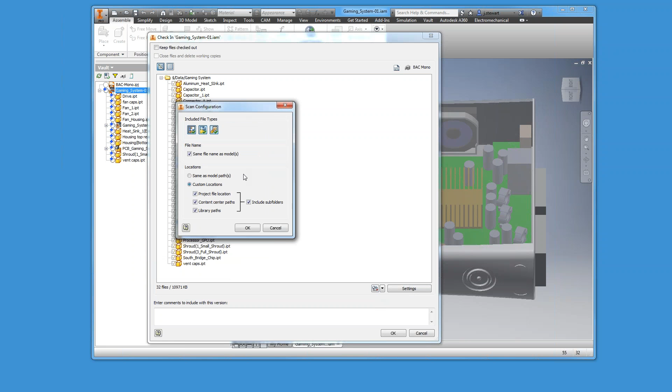You also have the ability to check in models. Just a second. And then you can... So you have the ability to scan through a whole document. If there's 2D drawings associated, they'll pick those up and bring them in as part of the whole check-in, so that the whole model gets checked into Vault, and then we have the ability to assign categories to these and apply life cycles and revisions to them.

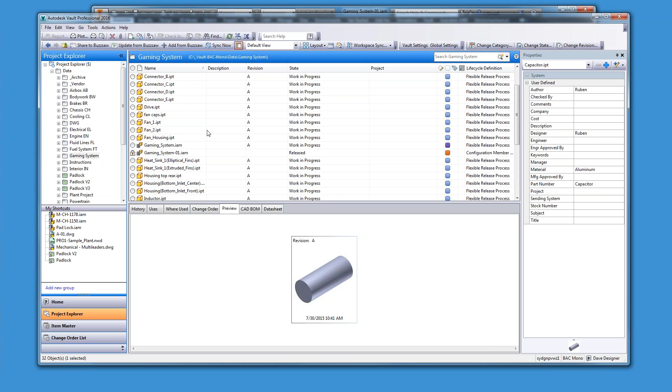So once the document's checked in, you can set it up so that you could do lifecycle changes directly on it, or you can restrict the system to say that changes are only applied through a change order process. And that's a configurable setting within Vault. You can define through the change order whether you want to restrict lifecycle changes to these documents using change orders. And then if I try to do a state change on this document, it will flag me and say you can't do this. It has to release through a change order process.

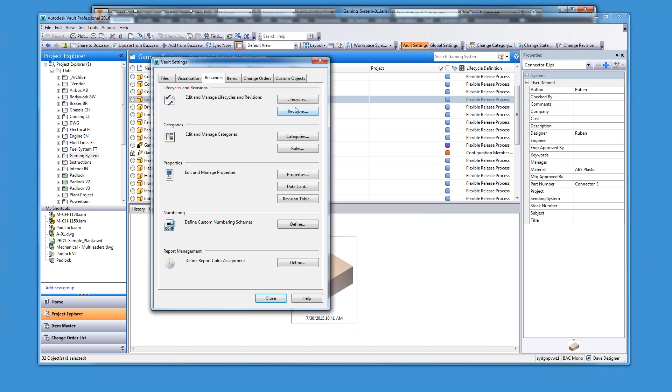So I'll quickly just show you what categories and life cycles look like. In this case, you can put categories on folders, files, and items. I've defined an engineering category that has a specific life cycle and a specific revision sequence tied to it. And then I've got a number of properties that I want describing this part when it gets checked in. So this is the core of Vault document lifecycle, having these workflows with relationships and properties. As you can see, you can have multiple life cycles applied to a category.

So you could have a prototyping workflow that's for the initial preliminary design, you could have just work release, so you're able to capture the history as you do that. I've seen cases where the revision scheme may be numeric for pre-release, where you're saving and keeping those historical versions, and then when you go to production, you can change the life cycle to a longer, more inclusive process of review, checking, and release, and you may even change the revision scheme from numeric to alpha, and follow the process that you have today.

So that's the core thing. You also have these rules that when files get checked in, you can define if the file extension is an assembly, then put them into category engineering. So you build out these different rules for different types of documents to assign them to categories that give them life cycles, revision schemes, and properties.

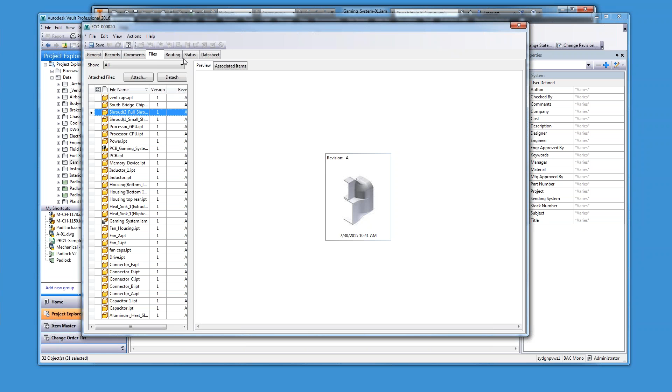And there is the ability then to make markups and give feedback so that as it goes through, you can have external people reviewing it that aren't necessarily part of the design team capturing that feedback, and everything is contained within the ECO for reference. And then historically, you can go to these parts in the future and see them at different revisions and look at the change orders that controlled that change.

So you'll see here I've got some routing lists, so I'm going to change that to a core group of Dave the designer, Ed the engineer, Mike the manager, and Charlie checker. And you'll see this is the workflow that's available. Anybody can create change orders. Then you have this sort of gatekeeper who would assign it to a responsible engineer to work on. And then it would go to a checker who would iterate it with the engineer or designer to make sure it meets and conforms to all of your processes.

Then it gets sent over to a review stage, and here you can have multiple people reviewing, and you can make it unanimous that all of them have to approve it before you can go to the approved state and close the ECO. And at the approved state, this is where you would release the parts that are on the change order, which then locks the documents in a released state at a revision. So I'm going to save this ECO. I'm going to log back out and log back in as Ed the engineer. Let's see.

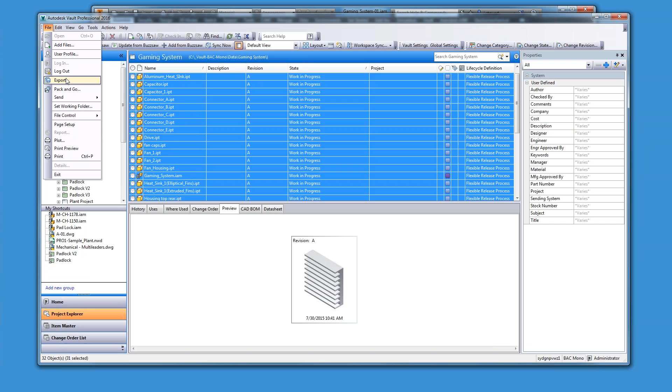Or Dave the designer. Let's see. It's in the work state. Let me go back as administrator.

You'll see also on the left-hand side you have this work order or work list. So basically, as the ECO goes through these different transitions, you, based on your role in the process, will be notified that you have actions to be completed. So in this case, as the administrator, I'm going to submit it, and it'll go to Mike the manager, who's ultimately the change administrator.

So on every transaction, it will then request you to add comments, and these comments then get captured as every action happens through the workflow. There'll be comments created. It'll be there traceable for history.

So I'm going to log back in as Mike the manager, and then I'm going to assign it to Dave the designer. At this point, Mike the manager could review the change order, determine that it's not actually of any value and that it needs to be either cancelled or put on hold for a future date based on maybe the criticality of the change request.

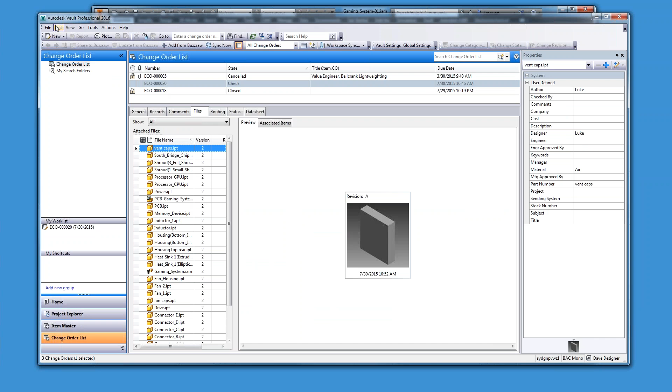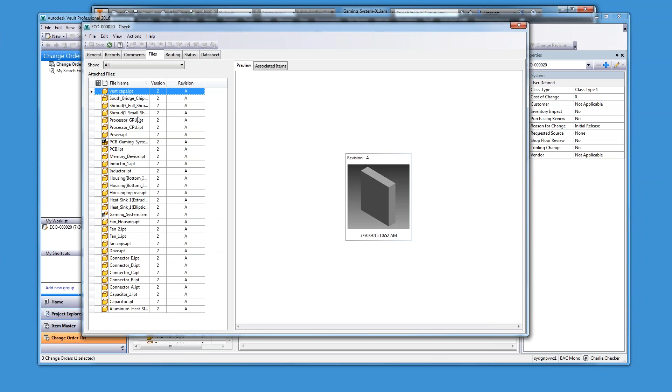So if I log in as Charlie Checker, you'll see he's got a notification for a change order. He probably can't edit it because his job is just to check it; he could view it and respond, or he could add markups. So in this case, he could come into this file, and then he can create a viewable file that then ultimately becomes available to markup.

Let's see. I'm going to actually send it, do an update of the model. So while that's happening, at this point, Charlie's gone through. He can click through all of these. We can actually set it up that these files are basically generated on a state change, so they're automatically set up. So he can come in here, and then he's got a fully active markup.

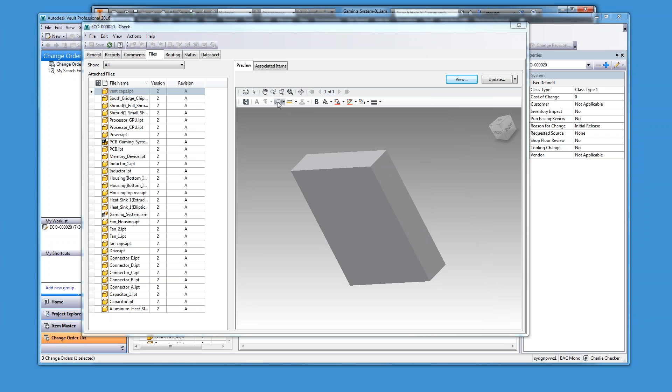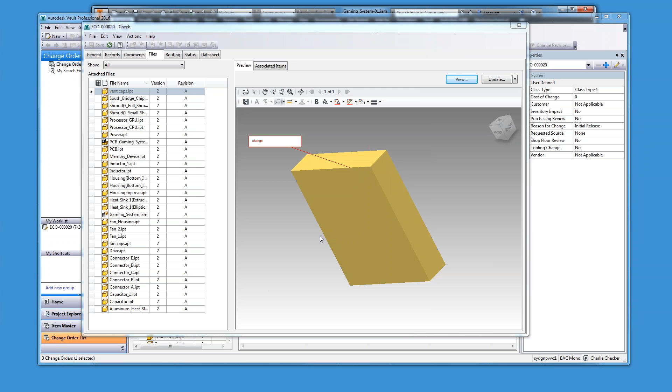In this case, it's a model, so he can only really put one comment. But if it was a 2D document, he has the ability to balloon things, put different markers, put stamps on it, and really give across the design intent. So once you've done that, you basically will then save the model or the markup back into the system. It'll be available and ultimately it's attached to the ECO for future reference.

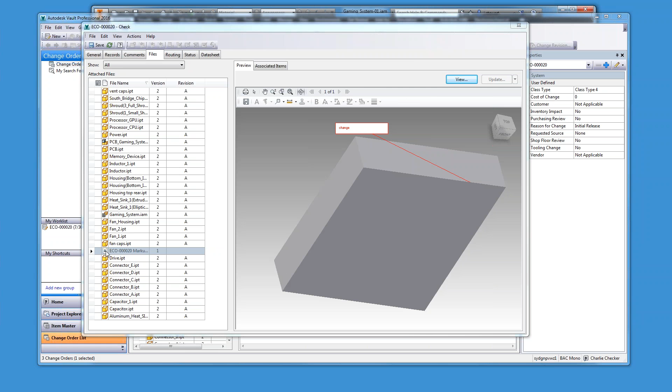So we attach all of the markups to the ECO for history. We basically define who the person is and ultimately it allows you to see the history. So in this case, he's now going to save it, and then he's going to potentially send it back or approve it. In this case, I'm not going to reject it. I'm going to approve it to the next stage, and you'll see here then it's sitting in review stage.

So at this point, with the routing list set up, the approvers are Mike, manager, and Ed, engineer. So I'll quickly log in as those guys and then show you the fact that it doesn't move beyond review because it's set up as a unanimous approver. So in this case, it's going to stay in review state until Mike, the manager, can log in and actually review and make his comments as well.

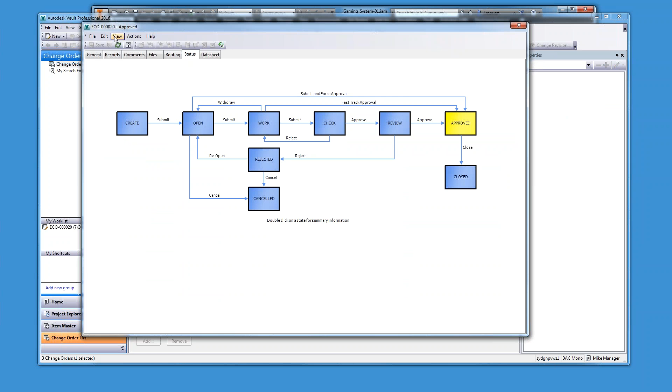In this case, he's going to respond, he's going to approve it, and you'll see now it moves in the approval state. So in this case, Mike, the manager, is the final approver, so he's going to come in, he's going to edit the change order, and then he's going to basically release the complete assembly, and then he's going to close the change order. So you see the whole part has been released, and it's locked.

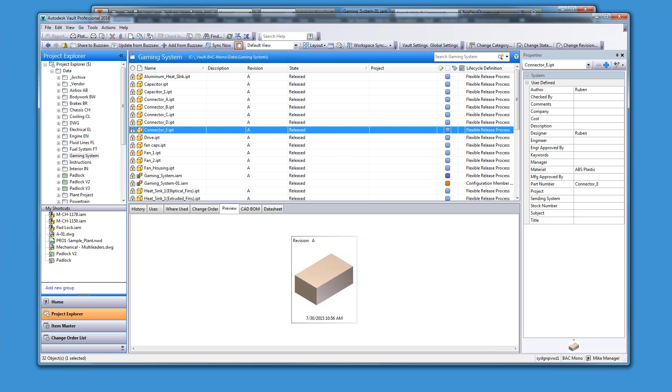So this is the workflow for being able to streamline, and ultimately, if you look at any of the parts now that have been released, you have that traceability to come back and look at a file and say, what was the change order? Go to that change order and ultimately see all of the comments of who approved it, why it went through the approval process. If there were any markups, they will be attached to it, and really you have a traceability forevermore to see who worked on this part, who released it, and ultimately you have this from a history point of view.

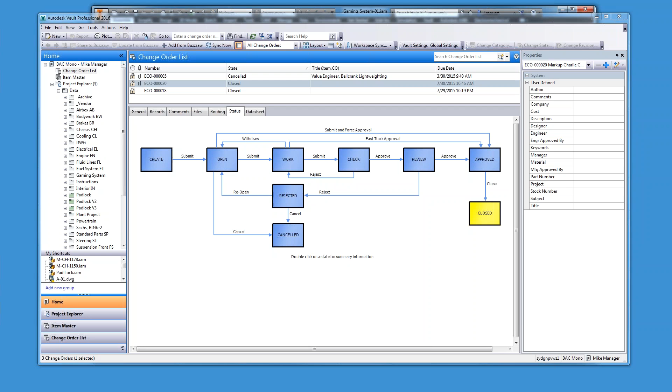So that's really the key functions I wanted to show around being able to do engineering changes, being able to review, and ultimately drive better efficiency through an electronic change order process. Okay, so let's go to the next section.

So one of the other things that we find is that being able to manage bill of materials and having accurate BOMs is really a manual process. It's really been manually managed, typically in spreadsheets. That's been taken from the CAD data, then it's been entered into the spreadsheet, either doing an export from AutoCAD Mechanical or Inventor, and ultimately then you're having to manage those BOMs and be able to manage the changes and then ultimately hand them over to an external system. Whether you as a designer or an engineer do that in the external system, sometimes you throw it over the wall to a specialist whose job is to maintain and manage that data entry to your planning system.

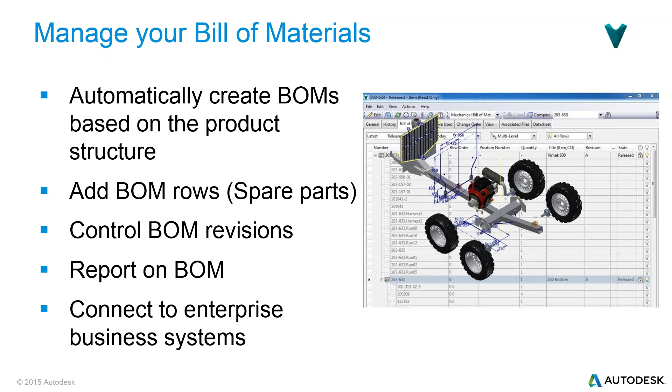So Vault gives you the benefit of being able to automatically generate BOMs, being able to now add additional rows to those BOMs, and really being able to control and report on those BOMs, so you see what changes are happening as they move through the life cycle, as parts change on your products. And really the intelligence of pulling the BOMs out of the models and the 3D is really the basis of this, so that there's no potential mistakes, and ultimately you've got that traceability. And then finally you can take that data and those BOMs and pass them over to your enterprise ERP system.

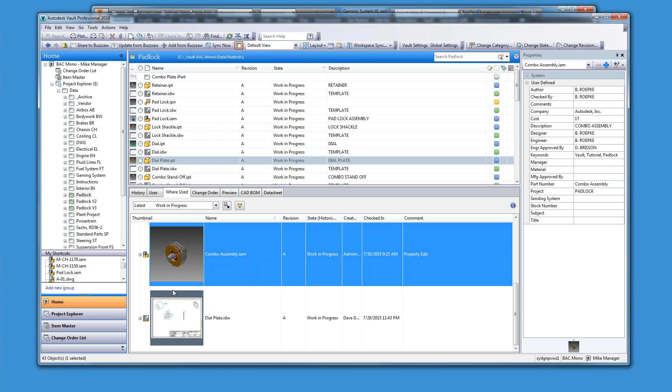So let's do a quick demo of that. I'll show you a padlock that we have in the system that ultimately was checked in. At this point, it's quite a large BOM, and you can see inside of Vault you have the ability to see where it's been used. You can look at parts and say where are they being used, what's being used, so you can see the whole family where parts are actually being used.

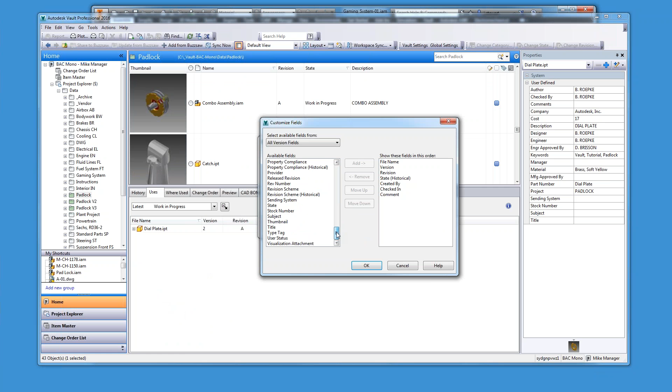So we see a lot of customers that configure their views to give them more intelligent thumbnails, which is really good, and that's really easy to do through a custom view. You can come down and really easily configure all of the columns based on the properties that you've defined, and ultimately you've got a lot of control over that. So you can also come in here and filter. So if I said I only wanted to see assemblies, if I wanted to see the drawings, you've got that ability through this interface to really see what you want.

And you can also come in here and let's do all, and then you can do multi-selects, and then if needed, you can do exports to Excel that basically will pull out all of the columns. So you can basically fill out as many columns as you want and get good reporting out of it.

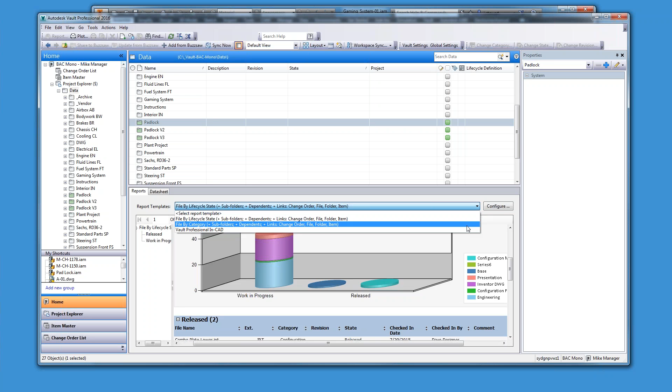Within Vault we have reporting capabilities to support viewing and looking at different life cycles, what's in what state, and who's working on different parts of your product at the time. As you get into having a platform like Vault, you have visibility into where things are, what's happening to them, and what parts are taking longer. There's lots of different ways to look at your data to determine if it's healthy, and just looking at it can tell you if files are not set up right. You can do a quick review, but it's just a reflection of the data that's in your folder, and ultimately it gives you better visibility and reporting.

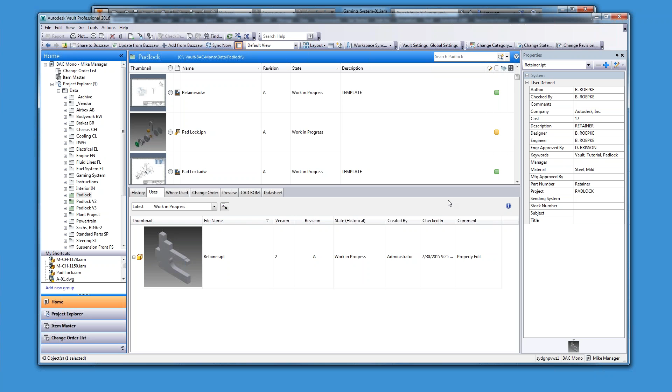So let's look at this padlock. I'm going to now assign it to an item. In the Vault world, we've just been talking about documents, document life cycles, and revisions, managing those on change orders. If you move into the item world, it describes the part and the documents that relate to that part. If you had simulation reports, 2D annotations, simulations, or presentation files, it's all describing a specific part. An item is about containing all that information together, and it shows you the bill of materials and the quantities that build up that part.

So in this case, I'm going to do assign item on the padlock parent, and you'll see right away it's picking up that there's a drawing, a presentation, and an assembly. It pulls out the bill of materials and shows you the quantities, allowing you to have more information. We can configure Vault to put BOM rows, and ultimately help you define and classify what these types of files are.

The idea is that this matches the data entry you need to do in your ERP system. As an engineering department, you have a clean interface to manage, control, and add spare parts or associated things that you don't model but want to attach to your bill of materials. So I'm just going to save that, and you'll see we put icons on the side to show that parts have bills of materials on them, so you can quickly go to the item and see.

We can set this up so a specific user only sees items and can come in and view this part of the item and bill of materials world, moving up and down to look at different things. They can go into the View tab and see if there's a model to it, view the drawings, and review it. In this case, we just need to set up that on check-in all of the files create these views, so the user can see them. But once they're in the system, they can quickly come in and set that up.

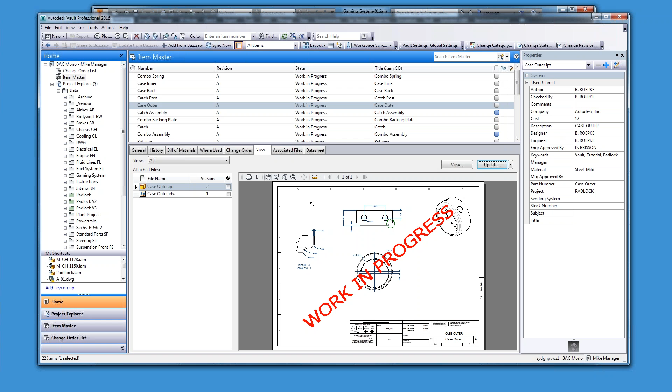So there is a configuration that allows you to create a watermark. You can position that in different places based on a setting through the administration console, so that it alerts people to where this document is in its life cycle, and they won't, hopefully, send it out to a supplier because it's still in process. But as you review and release it, these will change and control the visibility to the downstream consumers of the data, so they know it is released. In this case, we'd probably not let them see any of these documents until it is released.

So let's go back to the assembly, and then go to the item, and we'll edit it. Open. You have the ability here to add other rows. You can add existing rows, or add new rows. If you wanted to create a new part, you can, or if it's a process. These are all configurable to allow you to set up. So I'm going to do a product, and it automatically auto-numbers it.

It tells you that it was manually added to the system. If it's a spare part, you can select that there. These numbering schemes can easily be changed.

Depending on how you want to set those up, we can define different numbering schemes, and we can basically have them mapped to a file. In this case, you've seen the padlock is mapped, but this doesn't have a file attached to it. But if we were to actually come in and attach a file, which we can do in edit mode...

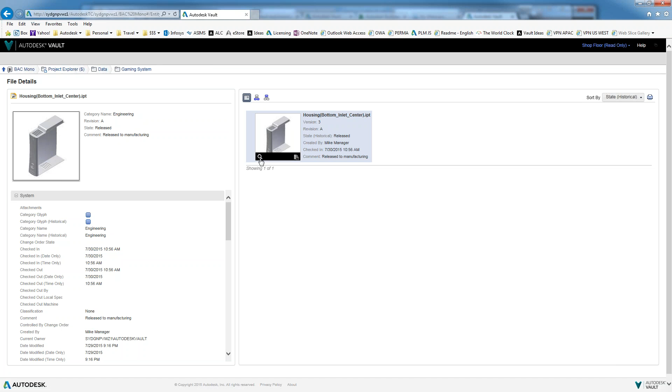So in this case, let's go over here. If we do a search on the product, we go to say a housing, they'll have the ability to view that file, and ultimately they can open it up in design review and be able to mark it up. They can do a markup straight inside of the viewer.

If they found something, for instance, in the shop floor that needed some fixing, if the 2D documentation had some missing annotations, they can easily take that out, mark it up, and basically provide that back to you. Ultimately, you then have a decision to kick off a change order, make the change, and send it back through a reviewer, and then make decisions on whether it impacts inventory. Is there a longer lead time because the part you need has to be produced and brought in-house?

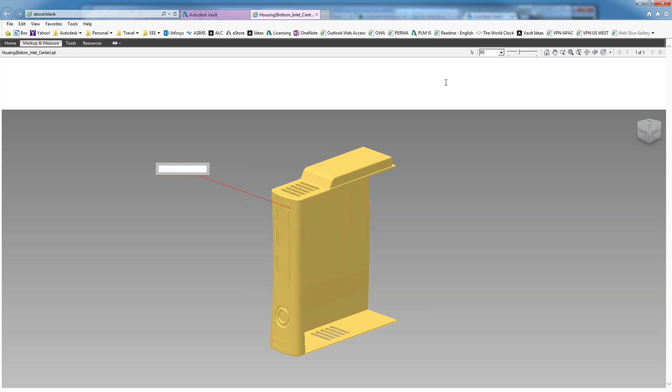So ultimately you're bringing the external individuals outside of the engineering department in, having the ability to see everything you're doing from a release point of view and be part of that process, which today maybe it's just them waiting for printed copies and versions that ultimately just take a long time to get out. So it definitely speeds up the process.

From a point of view of Vault and Buzzsaw, I'll just launch Vault and show you. You have the ability to publish from within Buzzsaw or within Vault. So as part of the process, you could set it up to push data out of Vault, and really you configure where that goes, and that's part of the administration, setting up a mapping to Buzzsaw to say files get pushed to this specific location.

So you would build in particularly customers that you want to share data with, or specific suppliers you want to share data with. You can, from within Vault, basically do add or update to Buzzsaw or push to Buzzsaw those models or even drawings, and it will take it back, a job server to pick those up and transfer them over to the Buzzsaw site.

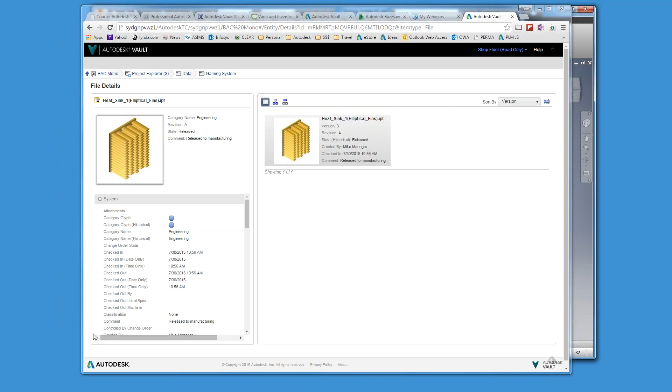And the Buzzsaw site is very similar to the Vault client. So for the customer or supplier, it looks very similar. They would be controlled and locked down to only potentially see the folders that you define them to have access to, and ultimately they would log in and only be able to access the data that's there.

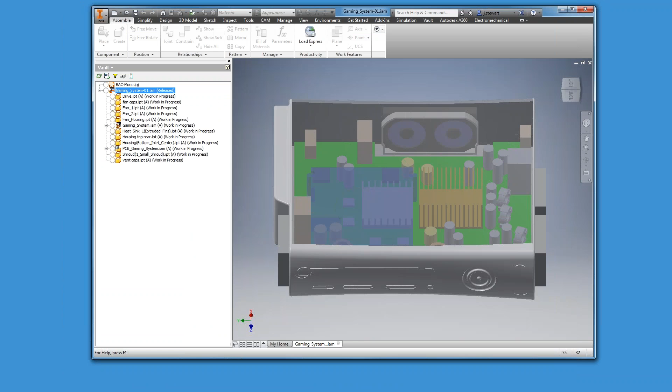Okay. All right. So that's, in summary, what Tuesday and today was really telling you about how Vault can solve your problems by helping you find things, reuse data, be able to collaborate with other designers, and then ultimately streamline the whole process of releasing and approving those models and products, ultimately building bills of materials that you can then share with your planning system, and then ultimately share that data with the other members in the other departments, with suppliers, with customers.

So it's really a full based system that ultimately can help speed up and manage what you do. And Vault is only a tool. It's really as good as the data you put in it, and ultimately having your teams embracing it and engaging and using it, and then mapping out your processes into the system and making sure it works for your users. Vault is very configurable in that sense. It can manage and map to the way you do things today, and hopefully not create much change other than moving you from a paper base to an electronic base.